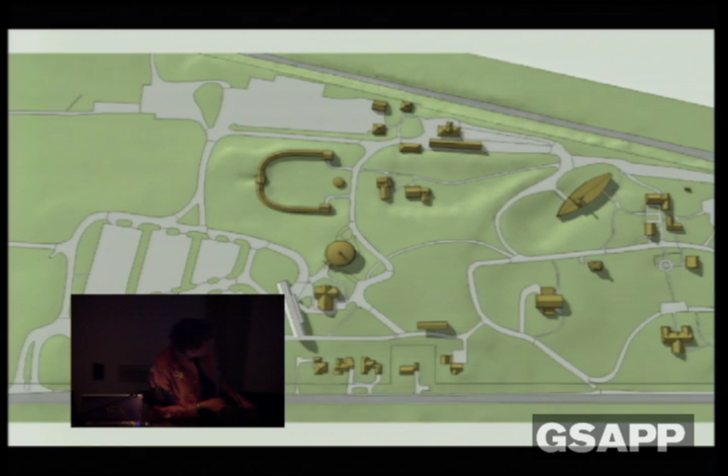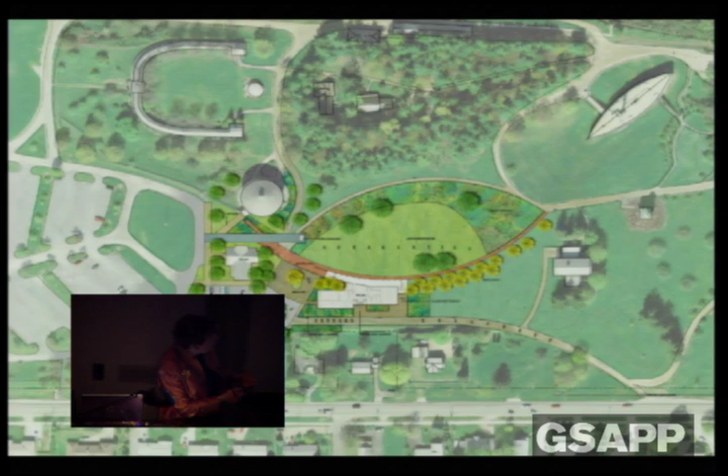The site is right here along Route 7. We spent months working on where this building would be, and you're going to see a sequence of how it moved, with each of four committee meetings discussing the various options. This building was wrought by many hands over a very long period of time. Finally, it nestled in right next to the round barn, and the entry building on a little area that was on the path—we changed some paths—and finally related to a larger concept about roads and adjacent buildings, access, and this arc of garden, planting, and horticulture surrounding it, so that it could sit appropriately in the site.

So the building was modeled, and the discussion constantly is, why shouldn't it look like a Vermont barn? It's got the scale of a Vermont barn, and it has the idea of galleries in it, which are large-scaled, so a Vermont barn seems like the right building to build.

Well, Mrs. Webb had collected barns—these were period barns from the 18th and 19th century from all over New England—and there's no way a barn built in the 21st century was ever going to compete with the real McCoy. There was a moment where we just said, well, you've already done it better than anybody else could do it. So the barn conversation got handled because it's the truth—they had already done true barns and true large-scale buildings rooted in the agricultural traditions.

So we started to look instead at something scaled more like their buildings and broken into parts. From there, we looked at cranking the building, moving it around, trying to get its scale and massing related to the domestic scale buildings and some of the larger agricultural buildings on the site. The result is this two-story building, but the lower portion is largely bermed into the topography, so from a sustainability point of view it has this natural performance because it's so embedded in the land.

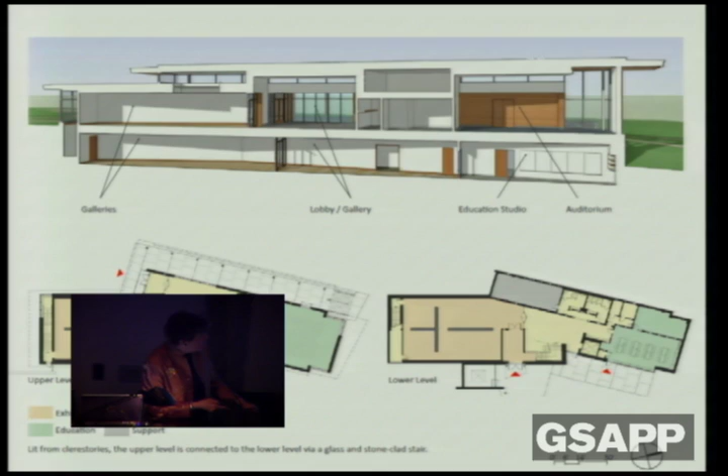You see here this very simple layout of the building. It has a long porch looking into the site, into the rest of the museum, and then it has galleries, which are the left-hand buff color, and green is a large meeting space. This is a very simple building, but its idea is that it's accessible year-round and speaks to the activity and commitment that Shelburne Museum has always had to its community, but wants to be more visible about.

Then the question was, what shall it be clad in? Shelburne has every kind of building on its site—wood, brick, stone—so the sky's the limit, essentially. But with sustainability issues very much in play and the Vermont traditions, we looked at quite a few things that might seem worth exploring.

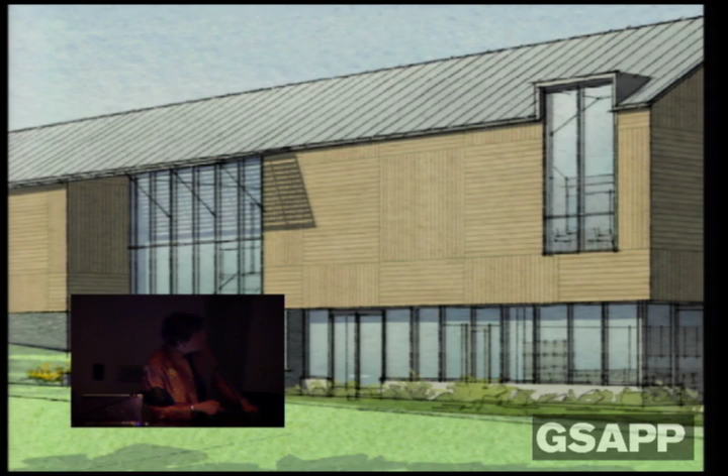We were next to the round barn, just across from it, and started to look at different ways to play with patterning and shingling and siding that was rough and more similar to agricultural buildings. We looked at directly using more stained siding and a cleaner line from a more modern point of view. We also looked at a great deal of stone, since stone is quite common in that part of Vermont, and finally at the kind of trim and glass systems that would belong in a building like this.

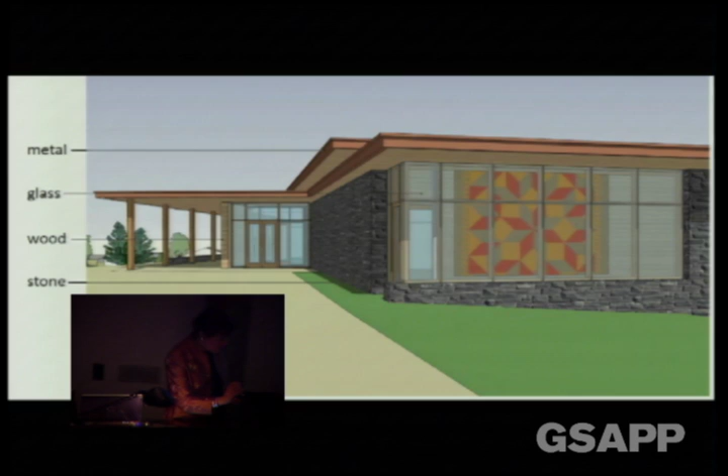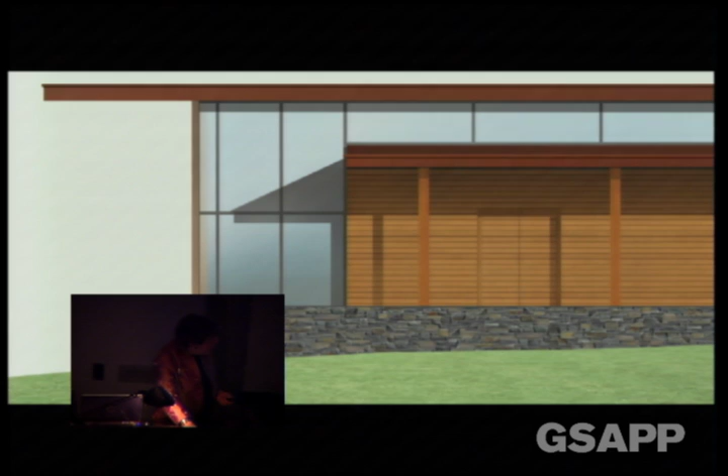Our idea was to keep the palette as simple as possible, not to get too carried away with too many materials. From there, we got into the idea that it would be a very simple kind of cedar siding, very lightly stained and preserved, hewn, not grown locally so much as finished locally, resting on a base of local Vermont stone that is its foundation and runs around the building. The columns are very simple timber on the front, but the siding plays in different ways, horizontally and vertically, depending on where the building faces and how the sun moves around the site, and how people see it from different angles.

So you're seeing now some of the renderings that were much discussed, because building these kinds of buildings is an act of tremendous public consensus building. One's building consensus with board, with donors, with all kinds of staff members, and at the same time with the community at large. I don't think there's a single project we're doing which doesn't have a strong community-based consensus as well as a strong governance-based consensus. And it turns out that architecture is like restaurants.

Everyone has an opinion. So it's a constant dialogue and navigation to try to both hear people and respect what they're saying, and also to kind of fearlessly barge ahead with something they may not have been thinking about. So this does come after many months of those kinds of very exciting and energetic discussions.

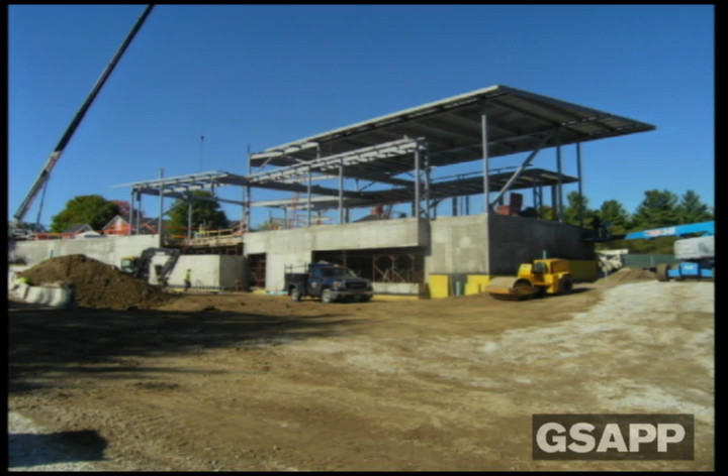And here is the building being constructed. I put in quite a few construction pictures because I think it's always important to talk about the act of building, not just the product at the end. You can see a little bit of the round barn over the top of this. So when the steel went up, we also had a lot of walls done so that we could see how the stone would be arrayed.

So right now it is a place which holds a lot of exhibitions of new materials as well as Mrs. Webb's folk art, and it's having its first year of activity. It's hugely popular, which is great, and they're able to get so much of her collection out and interpreted in ways that they couldn't before, and that's very satisfying.

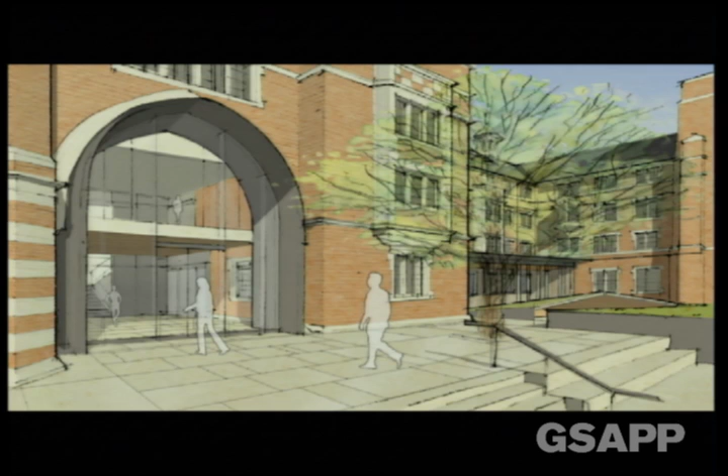So right now, we are unifying the building. We went through a process with the city of Chicago, getting the street turned out earlier, and we've been able to close off the street so that the entry is right in the truck portal, and we've built a spine and stair that connect all of the levels. So the first design intention was the unification of this very large structure.

Right now, if you go out there, you'll see more snow than this, but this is the construction of the space. It has two levels: one is the entry level, which will be up here at the limestone belt course—that will be where we enter.

And the other is looking through a large new conference room that will be built up into the upper portion of this huge arch, looking back towards the neighborhood back area, as well as out towards the whole Rockefeller Chapel part of this gorgeous campus.

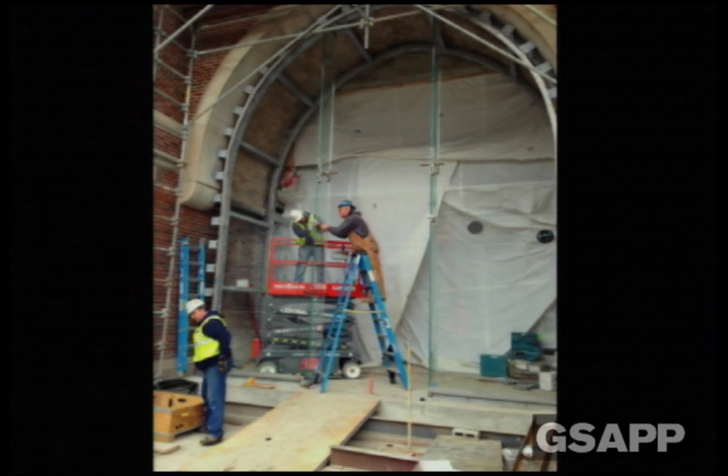The excavation here is deliberate. It is to support some things I'll talk about in a minute, but the installation of the hood and the way in which it's related to the limestone has been a work of art in itself, and our design team has really been fantastic on these kinds of details where we're touching history and at the same time trying to install something specifically contemporary.

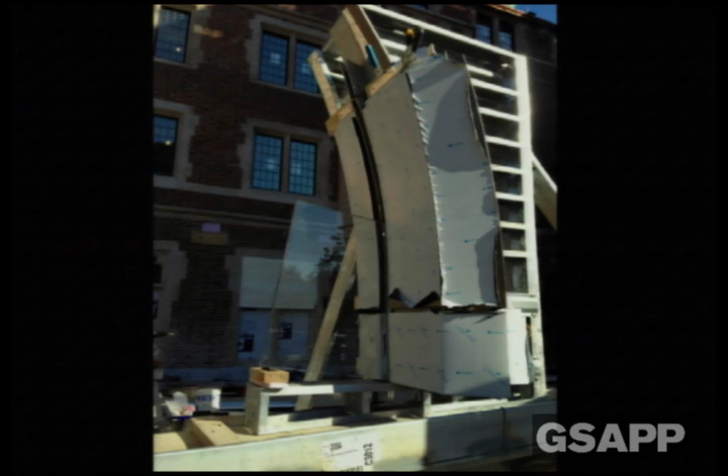So right now you can see this is the mock-up for the installation of the piece that will go into that entry. Everything is mocked up and checked. This will be a type of steel that has a slight burnished color to it, very distinct from the palette of the existing building. And the excavation supports two notions that are critical to the project.

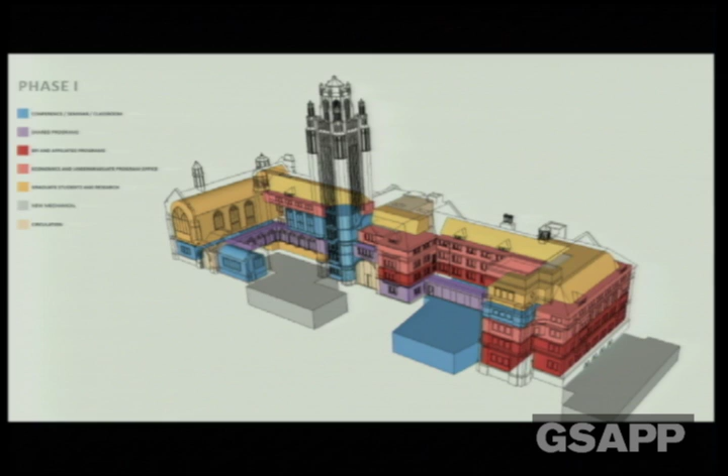The first is that all in gray is the mechanical system. These are the driving forces of some projects because the Chicago Theological Seminary never was air-conditioned, was badly heated, and in no way could people move into this building without a comprehensive new mechanical system.

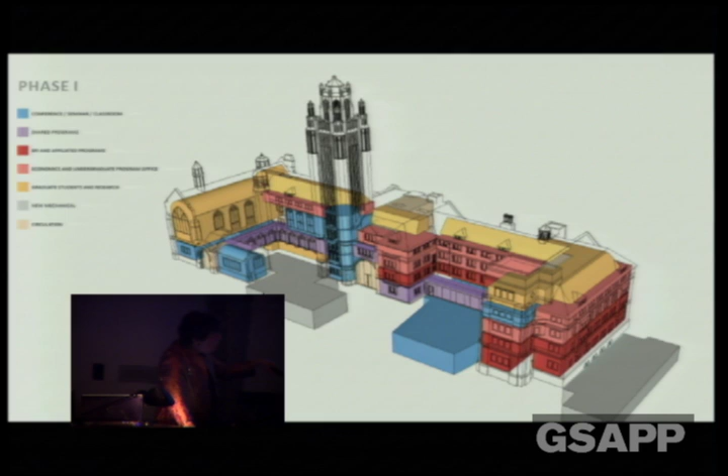So the excavation, which is about 25 feet deep on the left, supports the mechanical system, and on the right, because the entire program couldn't fit into the building, and those colors represent different aspects of the program, we are building a nearly 100-seat lecture hall below grade under the garden on the right. So that's what the excavation supports.

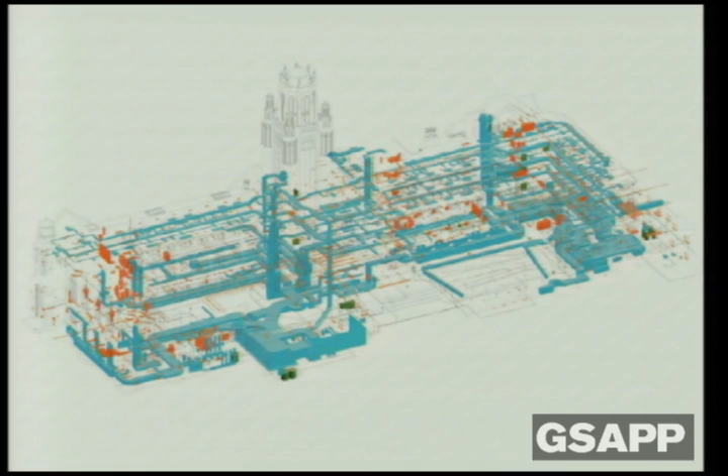There's a garden, a pulpit, all kinds of details. So what I'm saying is that the surveying of existing conditions, the ability to catalog things, the ability to sort through elements of significance and elements that are going to be in the way and how are you going to work with it is an incredible piece of a project like this, just to simply inventory all of the aspects that need to be retained.

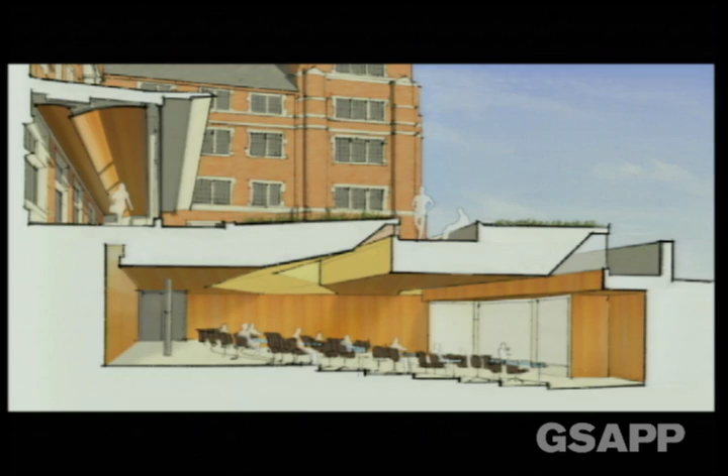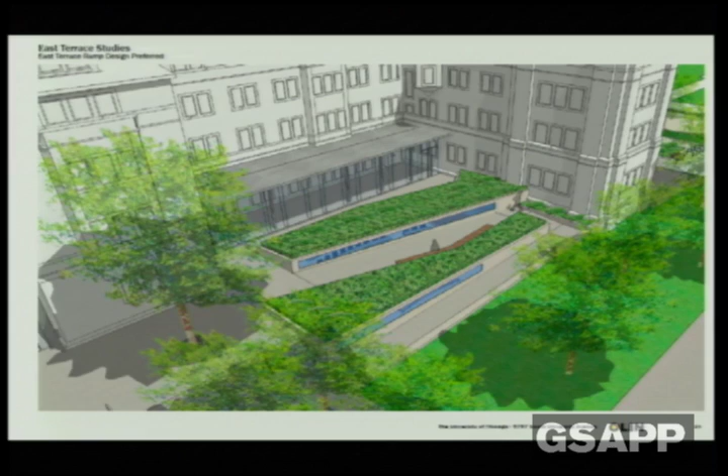And this is a view of the below-grade conference room that is built into the garden. And this is the garden with the brick wall now gone that will be constructed over its roof. And you'll see that there is glass going into that seminar room and a way of moving into the entry, which is over here, that now is an easy slope through a new garden at the front. So landscape preservation, urban advocacy, and then design have all come together on this project.

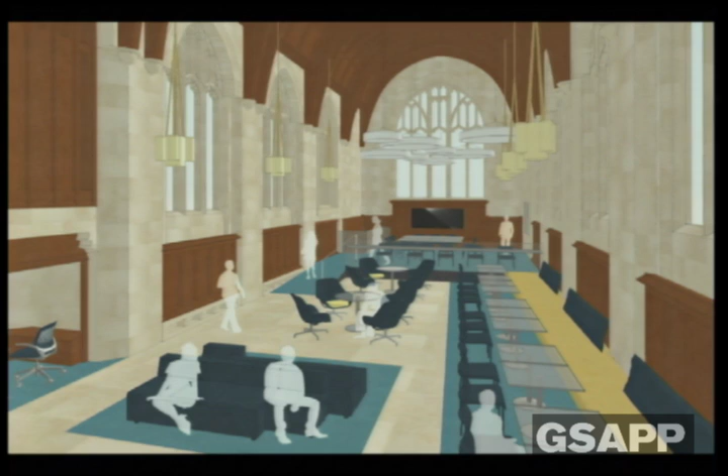And for rooms like this, where the former chapel, Taylor Chapel, the idea here is that it's going to become a graduate commons. It becomes very heavily used by the 100 graduate students. All of the woodwork is maintained. The lighting comes back restored. New lighting is installed at one end, it's going in right now. And the limestone and all of the woodwork is preserved. The room can be like a transformer toy and set up in different ways. It'll be AV'd, it'll have all kinds of connections to the global kind of interface.

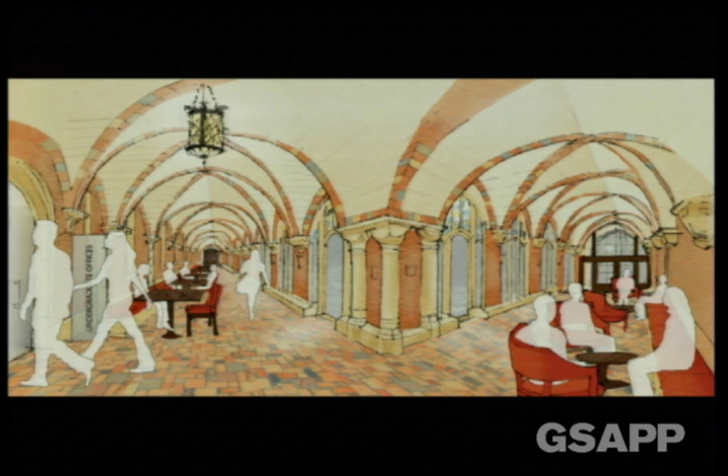This is now the cloister, which is going to be the entrance to the undergraduate offices. And then you have the library, which is not needed for the program. So the library is going to have all of its original wall paneling retained, all of its interior limestone cleaned, and be turned into a tiered seminar room. And all the pieces here that are new are also kind of floating away from the walls.

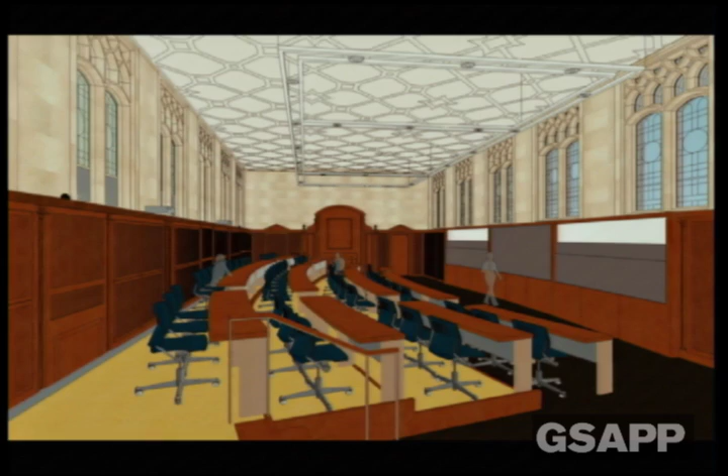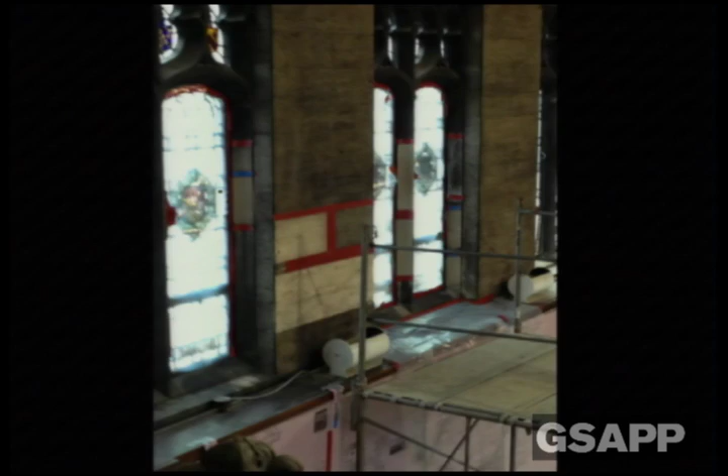So this is where we were with the library in terms of its condition and grime and just years of steam heating. And this is where we are with the cleaning tests. And this is the analysis of the cleaning tests. BCA, Ray Pepi, and Dorothy Krotzer are doing all this work for us. And you probably know them, and they're amazing.

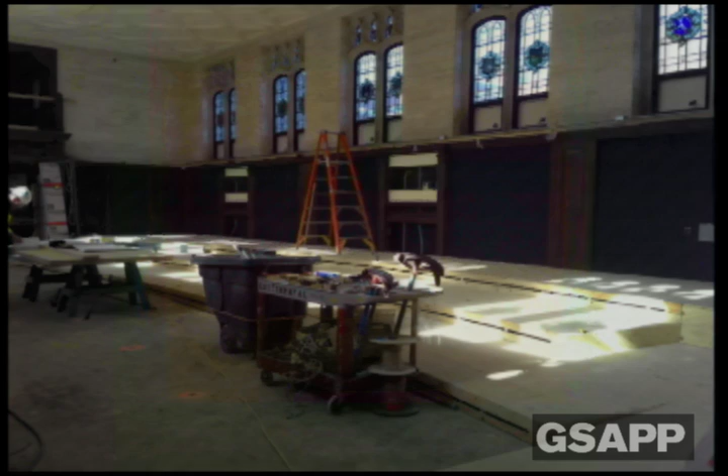And then this is the room right now. It's ready.

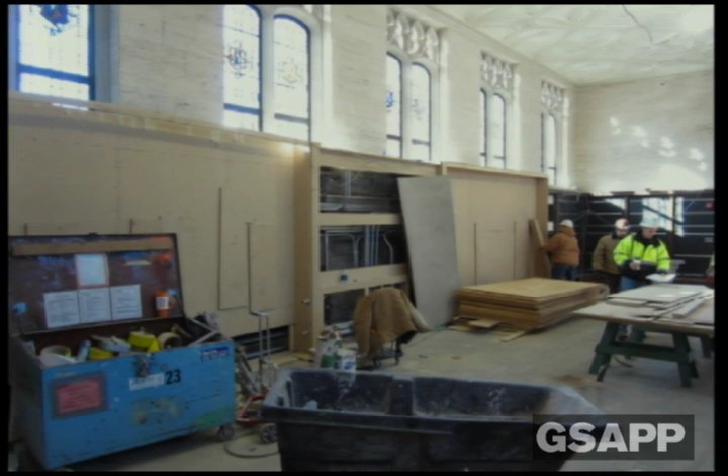As you can see here, the distribution of the heating and ventilating is under this tiered floor so that we didn't have to put any ducts in, and we'll then have all the seating and fixed desks put in there. But the room is starting to really get its mojo back, and it really was exciting.

I was there last week looking at it, and it's just wonderful. So this is going ahead, and then finally for the rest of the graduate students, we went up into the attic and saw that you did have head height, you could move around it, but all of the trusses were clad with terracotta block for fireproofing. So with different code compliance strategies, we were able to take the terracotta block off, and this is kind of the IKEA loft for grad students.

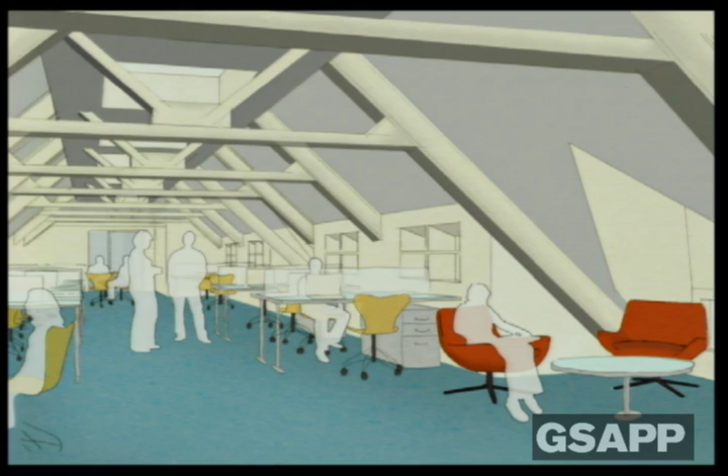They'll have lots of movable workstations here. They can be here and collaborate. It's kind of a studio environment, and that's in construction right now.

So because we're talking about preservation, I just thought I'd take a minute to talk about a couple of different preservation issues on this building. It's impossible as an architect to know all this, but it is also obligatory to know enough about it to yourself be a good client to conservators. So the facility and fluency of the language of preservation is really essential to our firm's practice.

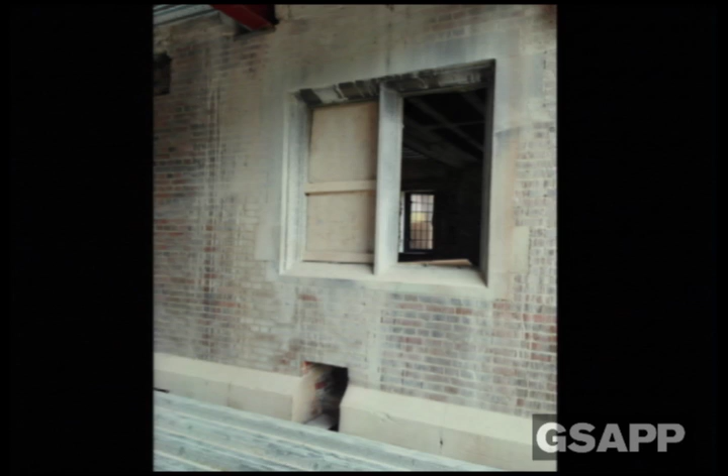And when we see a condition like this, we know we have to have experts, but we have to be able to ask the experts the right questions. So one strategy we've used on this building is to actually use some parts of the building that are less significant and needed alterations for chases or piping as the quarry for the new limestone replacements. So we're sort of cannibalizing where appropriate, taking the limestone out, recutting it, and then able to put it in.

To avoid things like this, which is what one of the subcontractors originally proposed as a way of dealing with mending bad limestone and recutting things, so that we're able to work like this with a new piece of limestone.

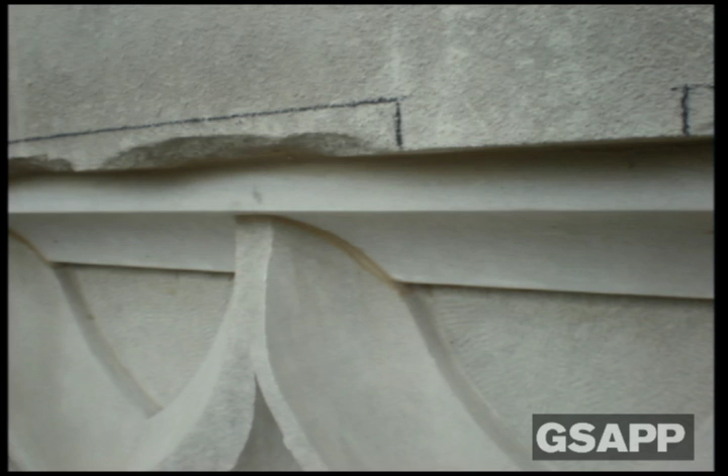And again, this is a sort of triage that needs to come along during the planning of the project, so that you know these kinds of repairs, which you see here, are possible, but will also last. Because once a building is renovated, it is not going to be maintained on an ongoing basis aggressively. There are just too many other buildings on a campus like this that are in the way.

And then we have the roof and all of the cupola restoration, all the flashing. We have 186 pairs of windows in the building to deal with, all of which were broken in various states of disrepair. Each had to be surveyed, analyzed, and in some cases they were missing.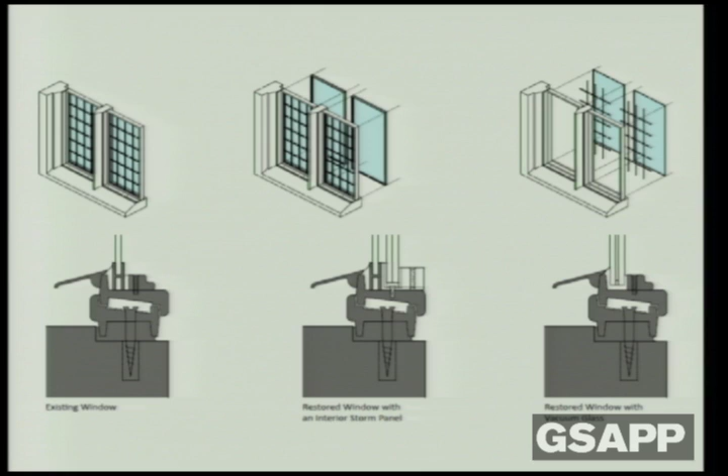A whole analysis of how new windows would protect but also enhance the building from a thermal point of view had to be undertaken, and mock-ups and analyses showed us if we spent this much money on a window, what we'd get in payback for the investment - cost per window unit, performance on total system cooling load, total system heating load.

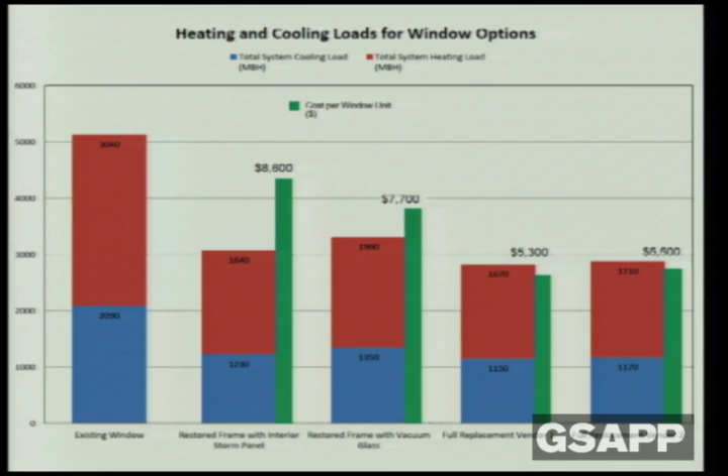It's really research, and it's research that needs to be done on building performance, and we're doing it live time on our project, coming up with systems and sometimes materials not made in the United States - not great for the LEED points, but really high performance because they've been manufactured abroad for conditions and under mandates that are more stringent.

Finally, coming back to the alley. We looked at the alley and the nursery school moved. So the project became a 3-building project when the nursery school over here on the left moved. And research teams can be in those buildings once they're restored. So that's going on right now.

But in looking at this, we asked ourselves, what kind of condition could we create here where the university's green campus could be extended into this new kind of frontier piece that's on the edge of its perimeter. And we looked at a new building.

And this is where the things that Paul cared about really showed up. To scale this building properly, we had to take the leadership about how big it should be. We had to take the advocacy for how it would relate to the row houses. We had to make sure that the community was comfortable with it, and that the way it slid in and connected to the historic buildings - both the row houses and the original house and the original building - were appropriate.

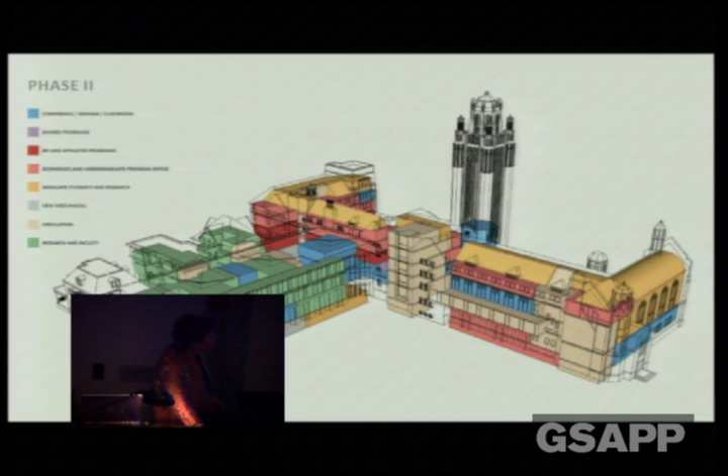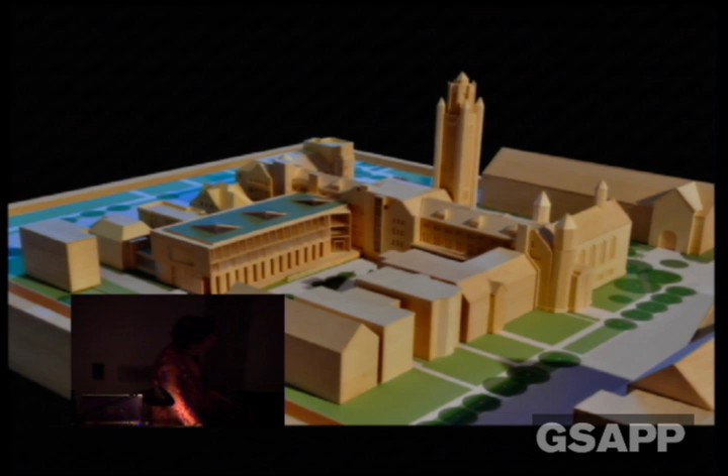We have advanced that, trying to find a scale for the new structure that relates to the scale of the townhouses, but also deals with a very robust and demanding population of researchers. So you see here the model for the new building at the back of the site, a building of 3 stories with a terracotta rain screen wall and various kinds of high-performance glazing systems.

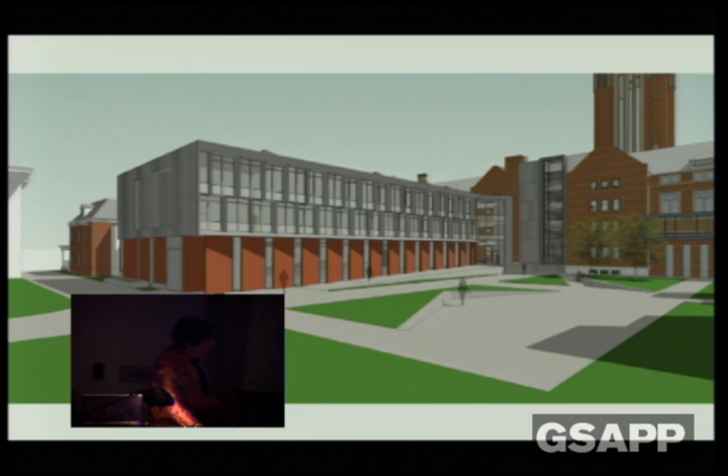The long-term plan is that all the backyards of the buildings the university owns will be turned into green space, providing a kind of campus environment in the back that changes this service alley into something that's really a piece of the campus, but not an impact on it, a found opportunity.

On the left you see the new building. At the center of the screen is the Theological Seminary, now the Center for Economics, and this green space that we've been designing with the leadership of the Olin Partnership from Philadelphia is an entirely new way of dealing with found spaces on the campus, really taking the dumpster locations and making them part of the campus fabric.

On the front, the same is true. This building sits behind the row houses. It's certainly visible, certainly a robust building, but it tries to find its scale within its family.

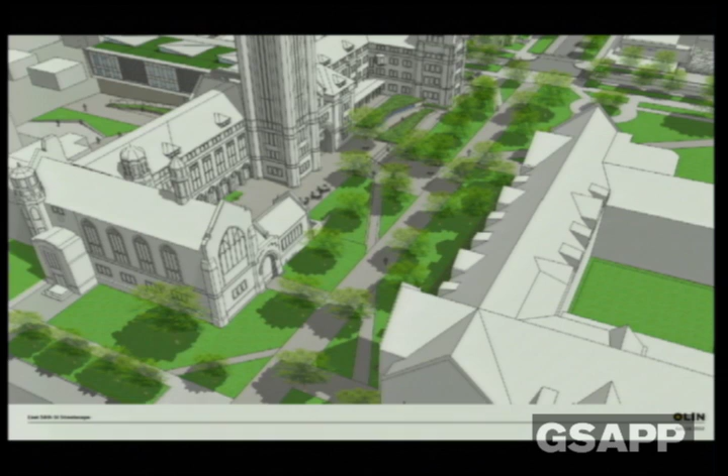As part of the final phase, the discussion of landscape became very robust, and we were thrilled that the university was able to persuade the neighborhood to close off the street, or make it a shared street so that only emergency vehicles can go down it, and to move the landscape all the way into the street, adding 70 new trees and 25,000 square feet more of green space to the front of the campus, places everybody in the neighborhood can enjoy.

So that's the story of Chicago, and it completes the first phase of it, which is the Theological Seminary, completing in about 60 days, which is very exciting.

You see here the way the underground classroom is expressed on the surface with the ramp going up. And then here, the colonnade connecting 2 sides of the building that were also unconnected, the center entry, and some of the other interventions I showed you on the north side in the alley.

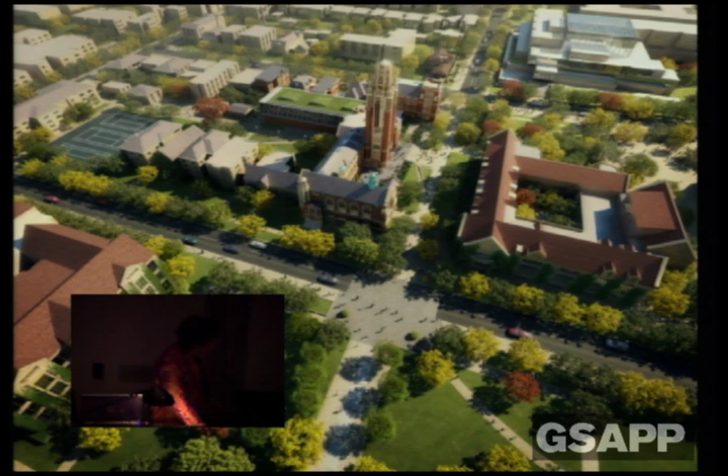This is institutional leadership at, I think, its finest, both for stewardship, to support modern design, to welcome the neighbors in, to comment, to embrace the cost of some of these things, and to persuade its donors that this kind of heritage matters to the students who attend the school and to the kind of robust intellectual environment and moral stand they want their students to take about their communities. I really give hats off to the university for thinking this way and being able to bring others along with it.

So finally we'll go to Walter Gropius in Athens, and then I'll leave you. Walter Gropius built the U.S. Embassy in Athens in 1958. What a German emigre to the United States was doing in Athens after the Second World War has not been written about. He was certainly a brilliant designer, but the whole idea, with the history of German occupation of Greece, that Gropius got this job is still in my mind an amazing reality.

And he was not the first architect they had. The project came to him after the design work by another firm just didn't get traction. Athens, as you know, is one of the densest cities in this part of the world, and Gropius arrived there to design, with a Greek firm, a building that would be alone, but of the fabric, completely monumental, and at the same time completely civic.

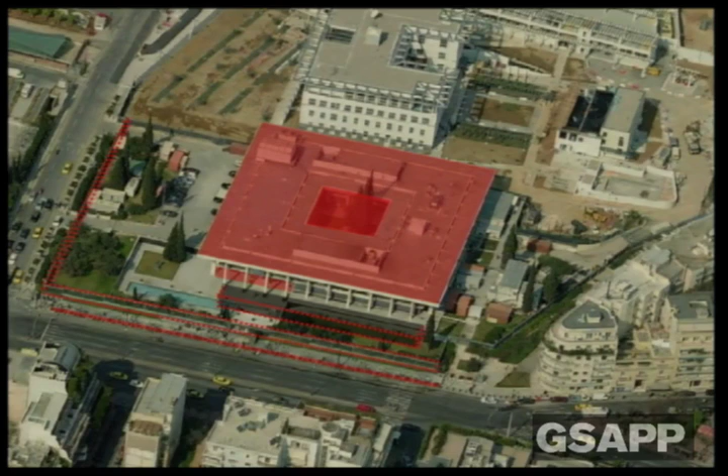So without focusing totally on security, we also are very interested in the building fabric. Just as I was saying for Chicago, it's so important to understand the history of the building, how it's put together, its history of repairs and maintenance, and also what the design opportunities are to work with the fabric or to somehow step away from the fabric and make something clearly different but still in conversation with the fabric.

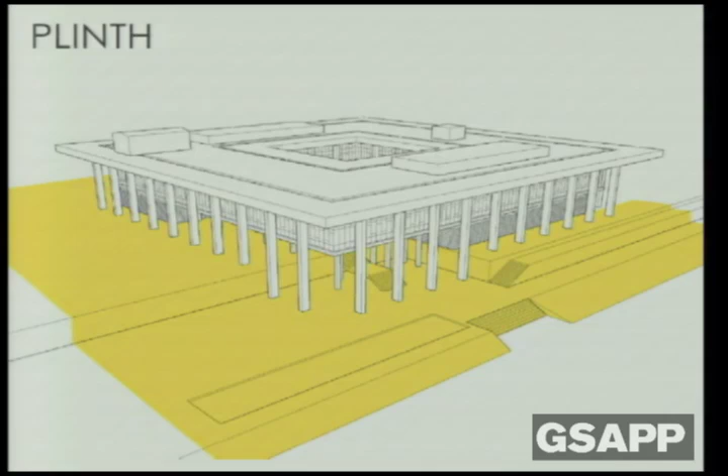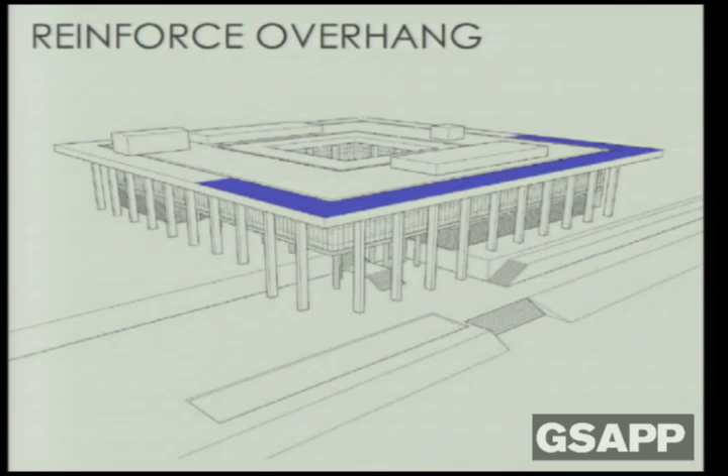That's really the stage we're at. So what we think about it right now—of course, we read as much as we can about what Gropius was trying to do, but we look visually. As I said, we're always looking. It has a plinth. It has a forest of columns. It has a courtyard. It has glazing and an envelope. It has a significant overhang that's probably not sturdy enough for the kind of resistance it needs to bear. It has beams that need reinforcement.

And when all of that work is done for the lives of the people or the work of the people—100 and some odd people who are in this building—they cannot just decamp to an office building in Greater Athens, because our diplomatic facilities really require that people be in an environment that can be managed under diplomatic constraints.

So what they've also asked us to do, other than analyzing the building and getting to a place where we understand it better and how we might intervene with it, is to look at the site, the campus of the entire embassy, which stretches all the way from this park down here to the street, and look at the possibility of a new structure related to and adjacent to the Gropius building, which would be used for expansion and relief during construction. And indeed, in the early 1990s, Kallmann, McKinnell, and Wood finished this building for the embassy.

It sits next to the Gropius building. It has a large, long garage that's here, a parking structure. And the idea is that somehow the work we do is going to have to bring the whole site, an addition, and the restoration of the Gropius building all together.

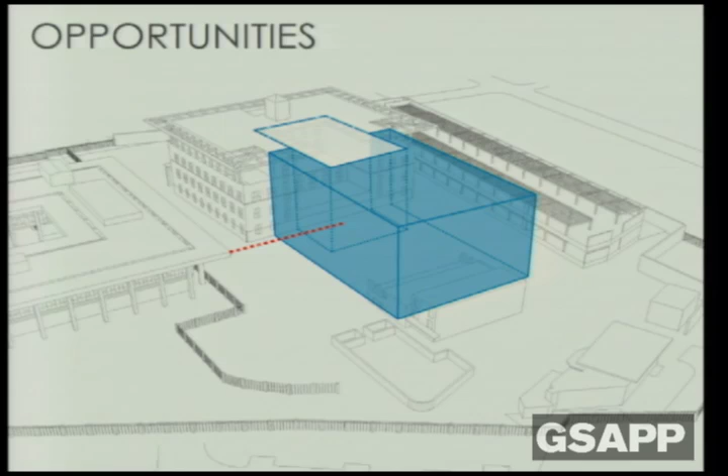So we've been looking just at the idea of massing, how many gross square meters you can get on the site, what the relationships would be to the setbacks to the Gropius building, how one might think about the Kallmann, McKinnell, and Wood building. They are a very distinguished firm as well, and their work deserves tremendous care, and how we would attach this. So I figured Paul would know what to do.

And I just closed because I would say, Athens has some amazing buildings, and Athens has amazing icons, and the American embassy is a privilege to work on, and it's particularly a privilege when you realize that the city has heritage beyond that which any of us could imagine. So as Americans, we need to work on our own facilities to bring them forward to something that the city is truly proud of and that we're all proud of and feel represents the very best of our commitment to our allies.

Questions? Sure. Mark has kindly offered that we have another minute if there are any comments, refutations, questions, or other kinds of things. Maybe everybody would just really like a martini. I would.